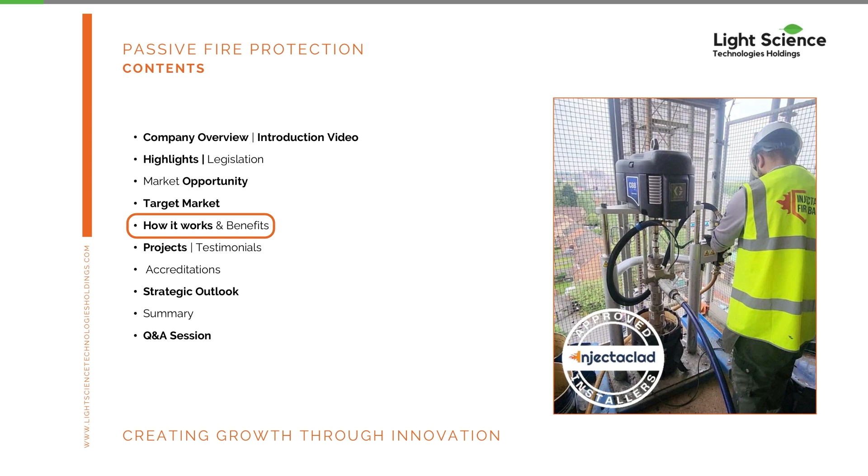In terms of setting the scene, what we're going to do is go through a company overview of Injecta Fire Barrier. We've got a fantastic introduction video that we send across to all of our clients. We're going to look at some of our highlights, the impact of legislation, the market opportunity as it stands today, how the system works and its key benefits, what really sets us apart, our accreditations, our strategic outlook, which is obviously very important today, and then a summary. At the end we'll do a Q&A session. Alternatively, you can come see me at the end and I can go through a little bit more detail.

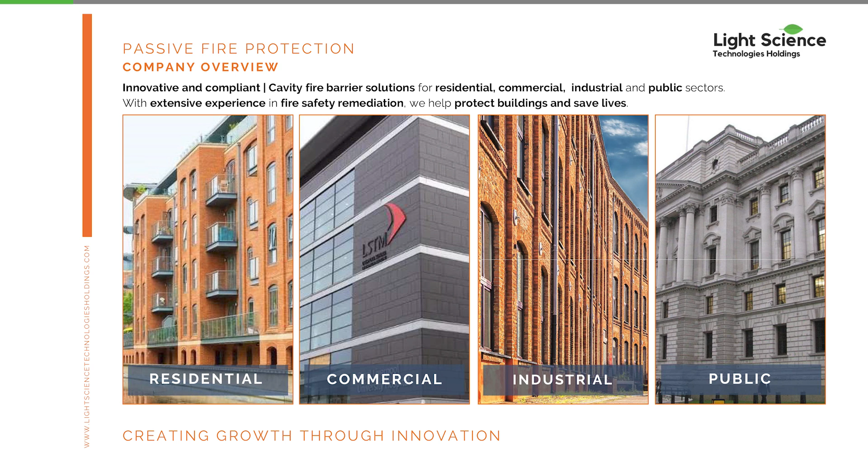In terms of company overview, we are Injecta Fire Barrier. We are leading the way when it comes to cavity fire barrier solutions across a variety of building types - residential, commercial, industrial and public buildings. With the extensive experience within fire safety remediation, it puts us at the forefront of building compliance and ultimately to save lives. What sets us really apart is the fact that we are the first independent Injectaclad installers within the UK. We are solely focused on the Injectaclad solution, so we don't get involved in traditional passive fire protection, which enables us to scale at pace and really focus on this particular industry.

What I'm going to show to you now is our introduction video. This really tells you about the problem that's facing the UK at the moment and also the problem that we solve.

A major fire broke out at a residential building in London. The fire, which began in a refrigerator, was fueled by panels. In the early hours of the morning, this was declared a major incident. There is nothing left of the zone. Certain tragic events in the UK and abroad have exposed the significant failures in building safety regulations and fire safety measures.

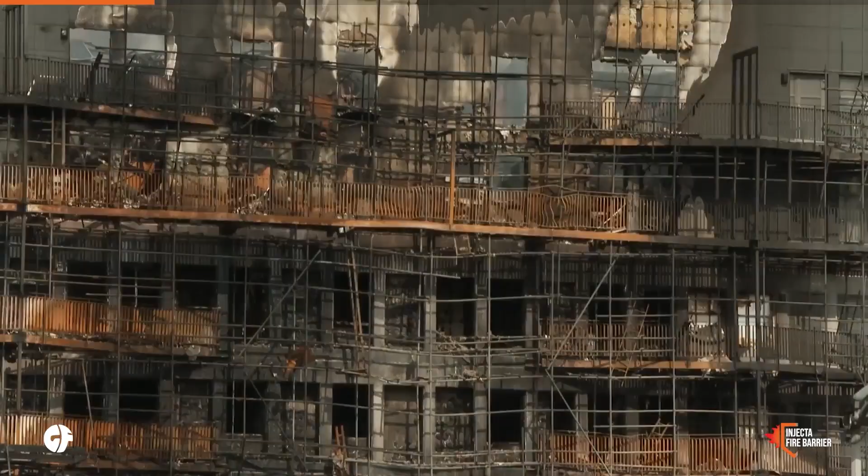In response, the UK government has allocated £5.1 billion to the Cladding Safety Scheme and introduced the updated Building Safety Act of 2022 and Fire Safety Act of 2021 to address fire risks associated with retrofitted cladding and other cavities in residential buildings.

Injecta Fire Barrier, a subsidiary of Light Science Technologies Holdings, are working towards ensuring existing structures are safe, giving peace of mind to owners and occupiers. Injecta Fire Barrier is the UK's first independent approved installer of the Injectaclad system, suitable for installation across most types of buildings with cavity construction.

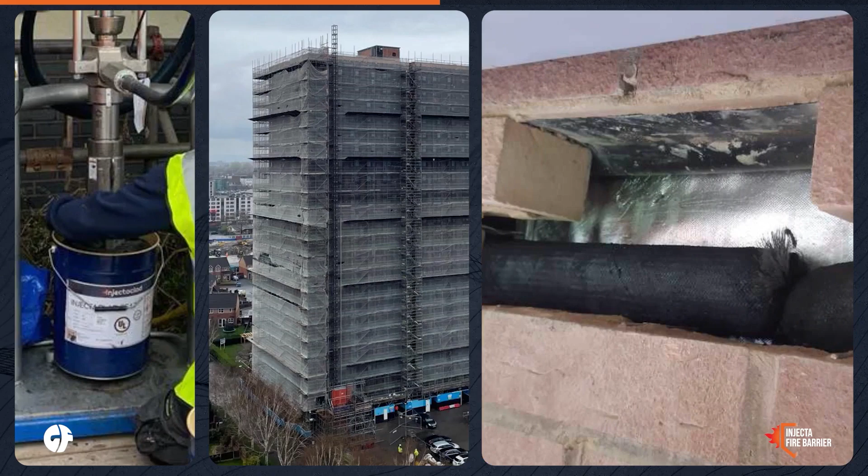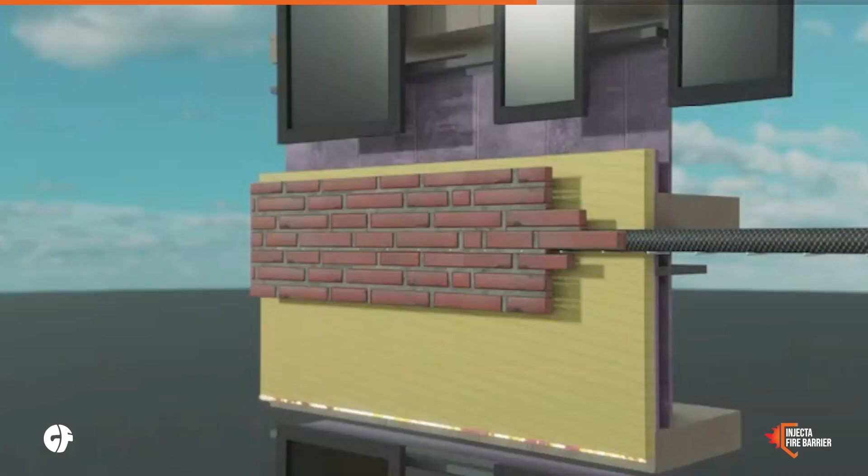Designed and tested to the highest industry standards by leading fire professionals Warrington Fire, Injectaclad is an acrylic-based graphite sealant that can be seamlessly inserted into the desired depth and breadth of wall cavities. It expands up to 20 times upon contact with heat, blocking any voids that would allow flames and smoke to spread in the event of a fire. It has become one of the most successful fireproofing methods.

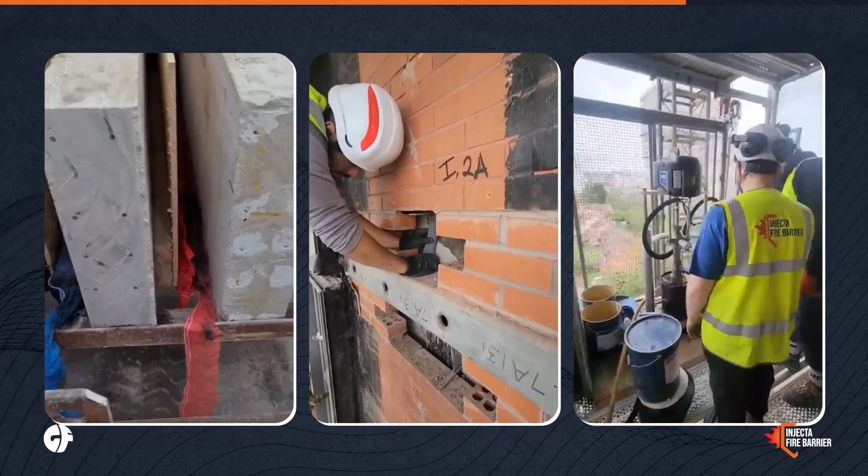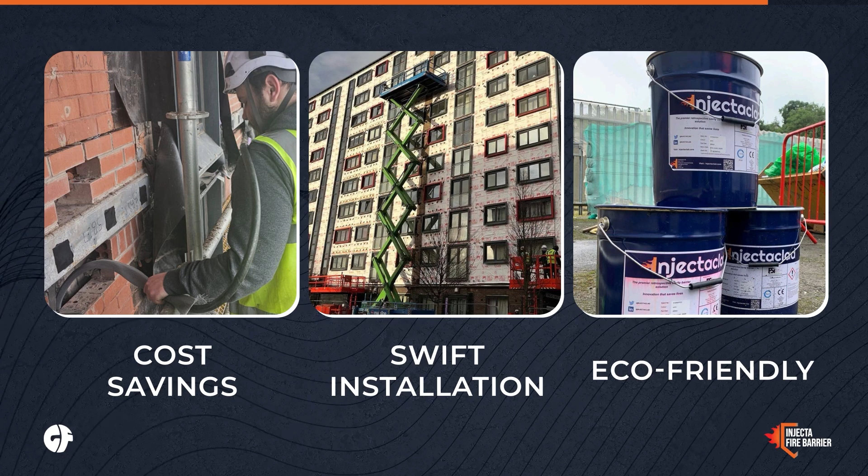Injectaclad has been approved for installation within residential, commercial, industrial and public buildings to reinstate the fire-resistant performance of wall and floor constructions without removing the existing facade, which is often not a viable option. This solution offers huge cost savings, can be installed swiftly across multiple elevations with minimal disruption to occupants, and is kinder to the environment by creating less waste material. With extensive experience in passive fire protection throughout the UK, Injecta Fire Barrier is working with other divisions within the group to support future developments which enhance building safety and ultimately save lives.

Thank you for watching. Again, this is the introduction video that we send across to all of our inquiries. So again, it really gives you the depth and detail of the solution and also the problem that's facing the UK at the moment.

In terms of highlights of 24-25, really excited to report we're profitable and cash generative after H2.

We've received orders to date of £2.7 million. In terms of our quoted pipeline, that's currently sitting at 14.5 million.

So that's qualified pipeline, meaning we've pre-qualified it. To give you a bit more detail, what happens is they contact us, we provide them with guidance, they give us all the technical data, and they also supply the FRA report, which is a fire risk appraisal of external walls, collated through fire engineers. We then go through the report in great detail, and a number of these reports actually specify the Injectaclad solution, which enables us to quote accordingly.

Then we go on site, assess the project, meet the team, and quote against the project on two elements: injection price and prelims. Then we put them through as qualified. This is quoted pipeline at 14.5 million, against 23 quoted inquiries. However, within our system we've actually got 57 quoted inquiries. The remaining ones are unquoted, but we estimate circa up to £35 million.

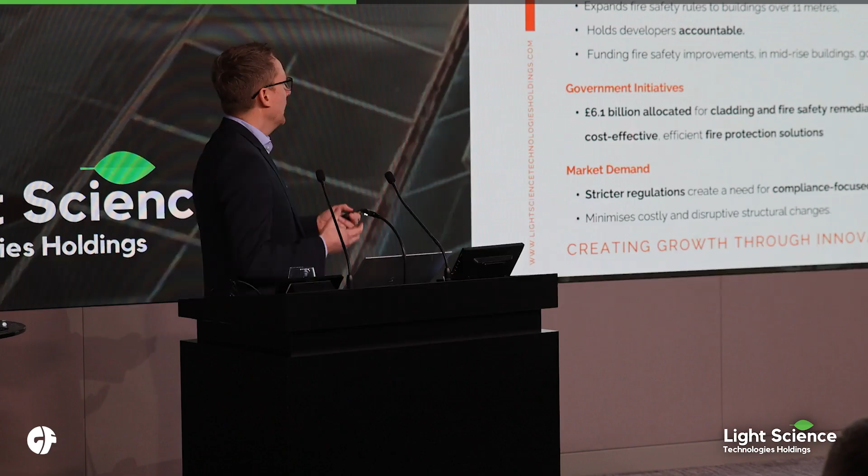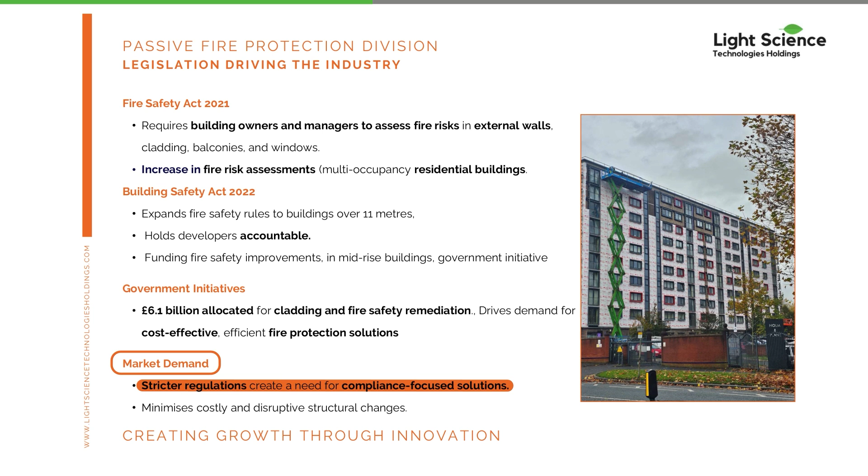Government-wise, there's a government initiative around £6.1 billion allocated specifically for cladding and fire safety remediation. They've actually drawn down £1.1 billion at the moment, so there's still around £5 billion worth of opportunity through specific government funding. In particular, they're looking at cost-effective fire protection solutions. In terms of total market demand, you've got stricter regulations around compliance-focused solutions, pushing towards minimising cost and disruption. Ultimately, from our perspective, that makes us an ideal solution based on the Injectaclad solution.

So looking at market opportunity, what we've got is a bottom-up analysis. This takes into account high-rise buildings, put into two categories: high-rise and mid-rise. High-rise buildings are above 18 metres. The number of remediation buildings in the UK is currently facing around 11,000.

Our typical quoted pipeline, we foresee around £1 million up to 4 million. There's a number of variable factors based on cavity depth - we charge based on linear metre and the size of the cavity. So if you've got a cavity that's 30 mil versus one that's 200 mil, it's obviously going to be more expensive. So typical project value is between £1 million and up to around four times that.

And then you've got the total addressable market, which we estimate at around £11 billion. So what that means is for high-rise buildings, you've got the EWS1, the external wall survey - if they've got a B1 or B2 rating, that's effectively a non-compliant building. That's a fire risk, and then you've got the associated risks of being a fire risk: the potential of being unable to sell the building, and increased insurance premiums if you failed the EWS1.

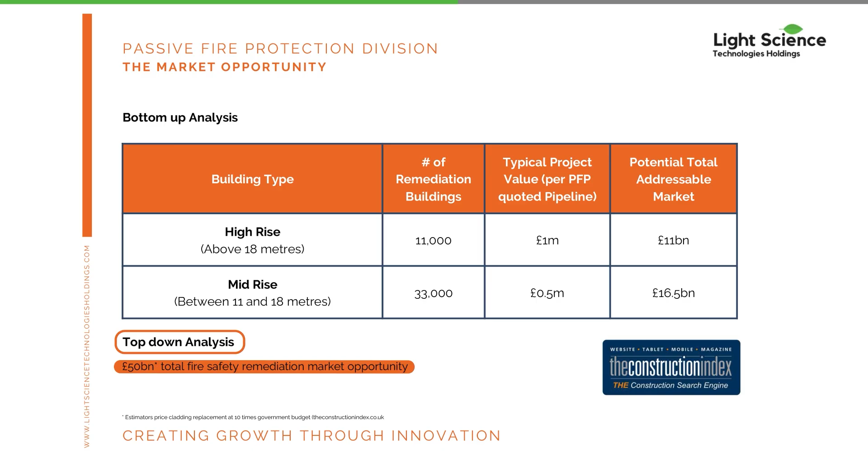So again, the opportunity is significant. Looking at the top-down analysis, in terms of total fire safety remediation within the UK, it's estimated to be worth around £50 billion. But of course, that depends on the particular type of solution. So that's the total market opportunity.

Now looking at our target markets, typically you've got residential buildings, social housing, high-rise buildings, apartments, councils and housing associations. You've got commercial buildings - offices, retail spaces - and mixed-use developments. You've also got industrial, which is warehouses, factories and logistical hubs. And then you've got public spaces such as hospitals, libraries, conference facilities and schools.

Interestingly, based on my analysis, we've received quite a number of inquiries about commercial property being converted into residential, so we've really been supporting a number of our clients through that transition.

In terms of end customers, typically these are building owners and developers that would contact us, and then you've also got the contractors and consultants. There'll be a principal contractor who'll speak to ourselves about supporting them through the transition of the remediation project.

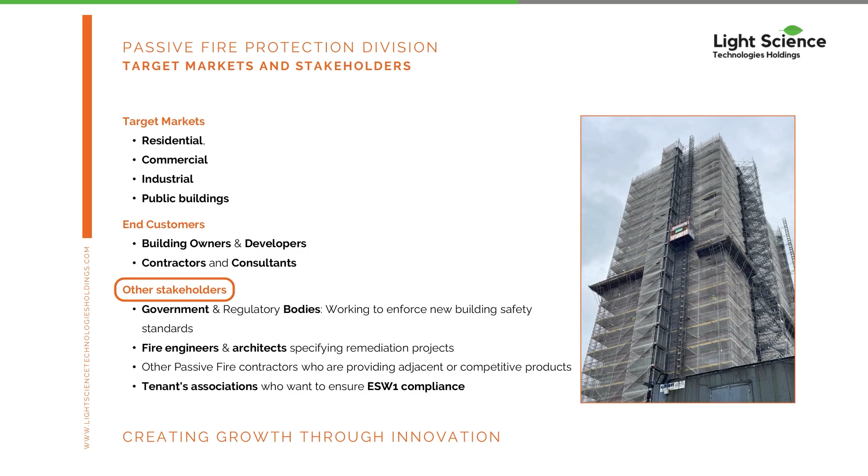In terms of other stakeholders, you've got the government and regulatory bodies around building safety standards, and fire engineers and architects specifying the remediation project. We get a number of inquiries from fire engineers where they've specified within particular reports that they're recommending the Injectaclad solution. And then you've got tenant associations.

There's a big push at the moment, and a lot of coverage in the news, around EWS1 compliance, where buildings need to be certified and signed off. And if they haven't, then they need to get that remediation work completed.

So just to recap how the system works: it's an acrylic-based graphite sealant, and what it effectively does is we pump it into a void under compression, and then we use a reinforced mesh made of polyester, and stainless steel holding pins. So what it does, it holds it in place. I wish I had a laser, I could demonstrate it for you here.

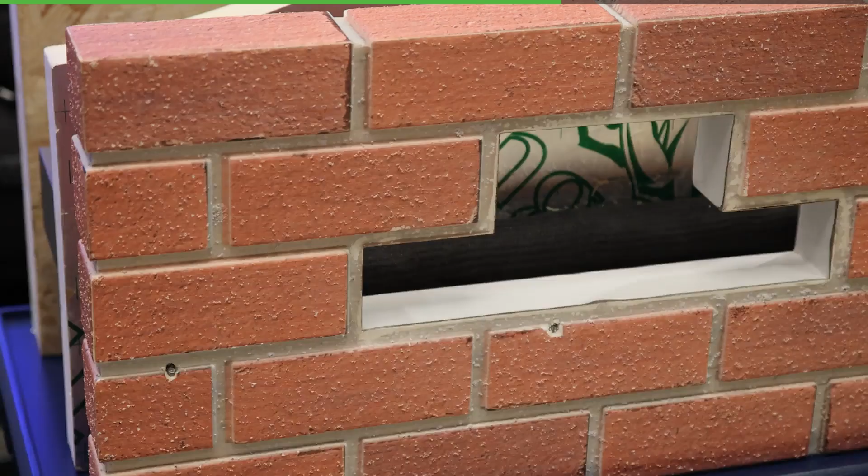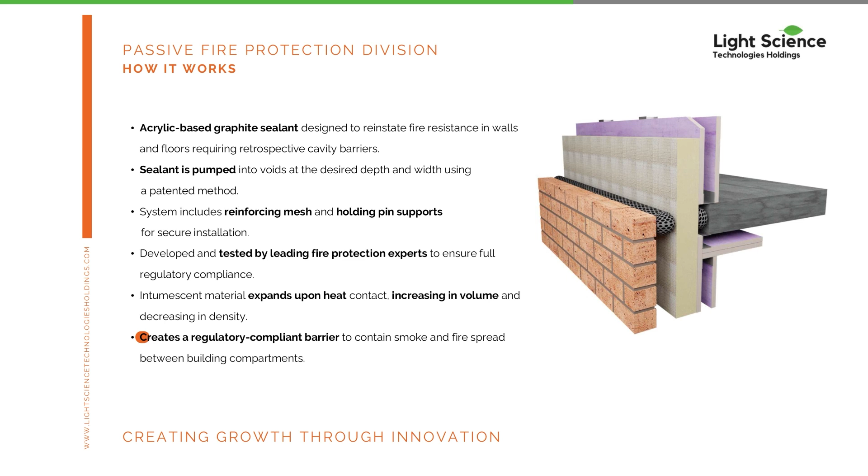It's developed and tested by leading fire protection experts for full regulatory compliance. It expands upon heat, meaning that in a fire it expands up to 20 times its size. So if you've got a void, a PIR for example, or insulation, and that burns away, it expands into that void, giving occupants up to 120 minutes of safety. So really, really important - it creates a regulatory compliant fire barrier system.

In terms of key benefits, what really sets us apart is you don't need to remove the existing building facade. We get a lot of clients telling us they've been quoted millions upon millions of pounds to remove a building facade, whereas this solution doesn't require that. It's a speedier installation compared to traditional facade removal, and we can install it vertically or horizontally - that's pretty much the standard.

In terms of occupants, it's minimal disruption. One key benefit is we don't need to ask people to leave the building, their homes - our solution is all completed externally, with no disruption whatsoever. As a developer or building owner, you don't want that additional cost. It's also more environmentally friendly, because you're creating less waste material by not removing the facade. So the benefits are: you don't need to remove the facade, it's speedier installation, minimal disruption, and more environmentally friendly.

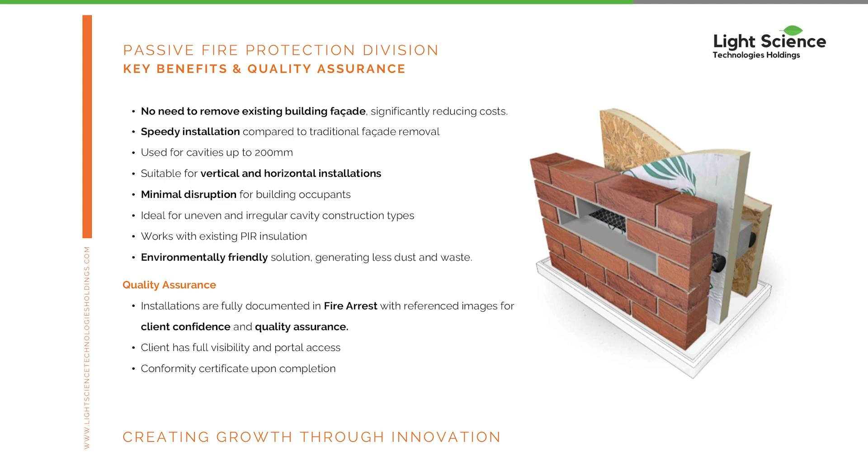When it comes to quality assurance, once the work is completed, unfortunately the amount of care and dedication that goes into the job can't be seen because you've put the facade back. So what we do is record everything on a system called Fire Arrest for quality assurance, which instills client confidence, and in terms of trackability they've got full visibility within the app.

We record up to 15 to 20 images of each and every stage of the process - exposing the cavity, installing the pins, inserting the sock, closing the cavity - and effectively it's a closed system. The client has full visibility, so when we're on a project they can dial in and see all the information, and at the end they get a full report and we issue a conformity certificate, backed through IFC.

Now in terms of some of the projects to date, just a few, we're very proud of these - we've got projects in progress and some completed. We've got a Salford project valued at £600,000, which was a vertical installation.

Again, it just demonstrates the partnership that we've created with some of our clients. Originally, from memory, that was around 6 buildings. And then they've asked us to come back for a part 2, effectively, for an additional 2 buildings. So you've got Salford part 2 on the right-hand side, which was valued at 1.175 million.

And then you've got a project that we completed in Liverpool, which was for a medical research facility. Again, that was a vertical installation. And then we've completed a project, or it's in progress, at Nottingham, which was valued at 757,000. That was actually student accommodation, and we seem to be getting a large influx of student accommodation coming through. So that's just a handful of some of the projects that we've got going on, and many, many more on the pipeline.

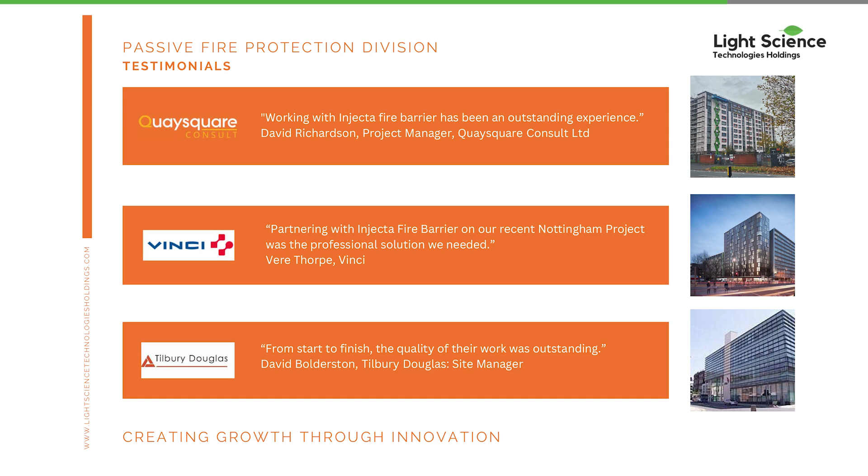So we've got Quaysquare Consult, which was in Salford. We've got Vinci, which I'm sure some of you will recognise, which was for student accommodation in Nottingham. And then we've got Tilbury Douglas, again a very large company, which was for the medical research facility in Liverpool. And some of the things that they've really mentioned to us was: we didn't know you were there because we were so quiet. Ease of installation, cost savings, minimal disruption, and the professionalism from start to finish.

Now, looking at our accreditations, again, we're very proud that we hold a number of leading industry accreditations. Just to name these ones - effectively what this demonstrates is our safety and quality and compliance, our dedication. So we're IFC certified, so that's the International Fire Consultants. You've then got the UK Building Regulations and Fire Safety Standards. You've got the ASFP, which is the Association for Specialist Fire Protection.

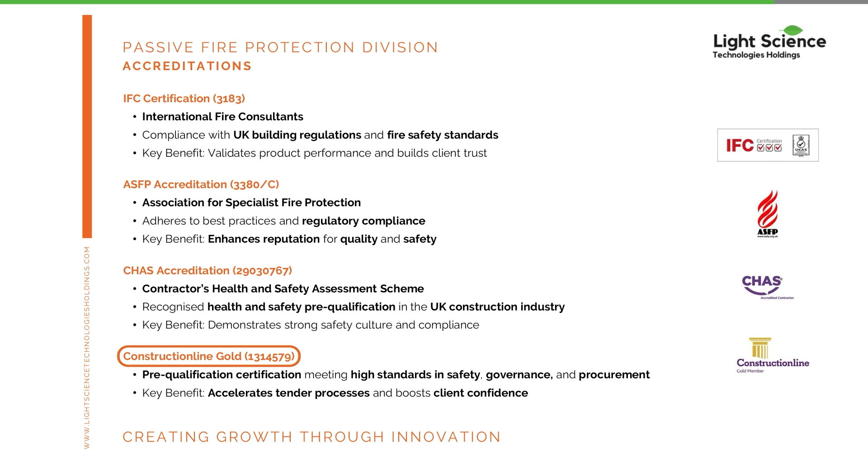Again, this is all around regulatory compliance, and then obviously the benefit is around enhancing our reputation, quality and safety, CHAS accredited. So this is about the health and safety assessment scheme and around pre-qualification within the construction industry. And we've just recently been awarded the Constructionline Gold from Silver. Again, this is all around pre-qualification certification, and it's about the highest standards in governance and procurement, and in terms of it helps us when it comes to the tendering process.

I suppose to mention why this is really, really important is a number of these accreditations - if we don't have them, our clients won't work with us. So when we go to pre-meetings or we're speaking to clients, if we don't hold a number of these accreditations, they will not work with us. They will not add us to within their framework. So it really, really does set us apart, and it also sets us apart on the basis that as only a handful of installers, we've got a number of accreditations that a number of the competition don't have.

So looking at strategic outlook for the next 12 months, again, it's around leading the way, and continuing to be the leader as an independent installer of the Injecta solution. Continuously raising awareness, banging the drum when it comes to speaking to fire engineers, architects, and also the building safety regulator. Leveraging our quoted pipeline of 14.5 million, and again that's predominantly focused around high-rise buildings, mid-rise buildings, and then also working with our partners around getting hold of their portfolio and looking after it for them.

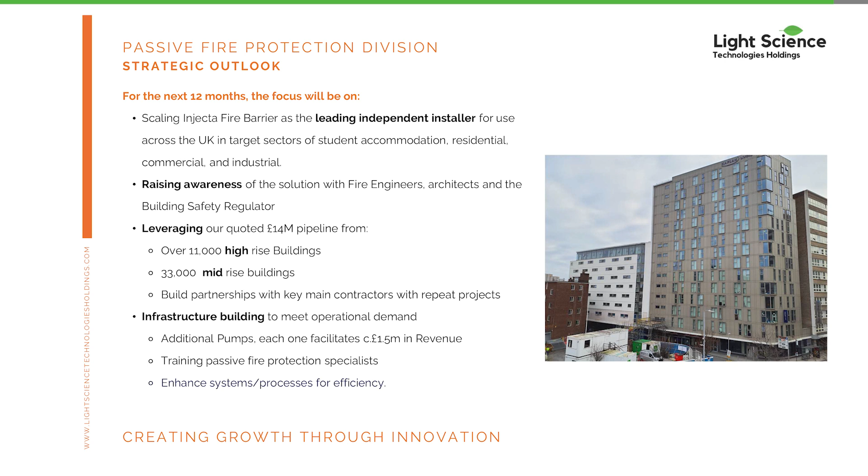We've then got around looking at our systems and processes, and then also acquiring additional pumps, and building on our team, and then obviously continuously developing our existing fire protection specialists.

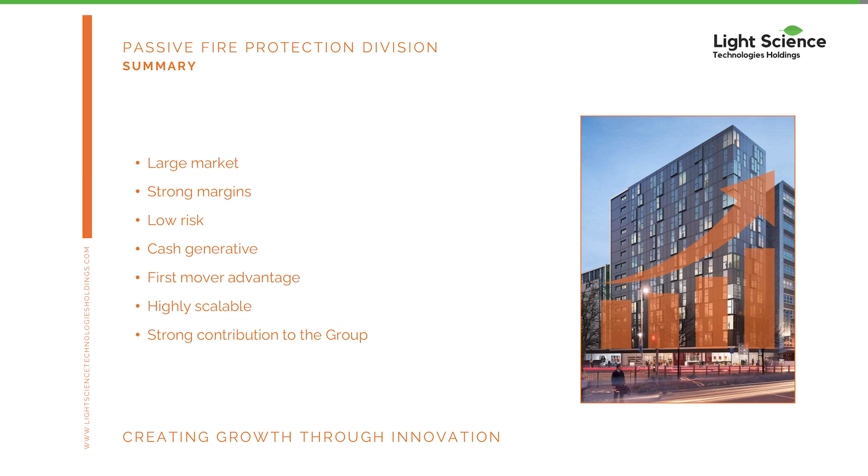So in summary - I was going to say massive, but I'm not going to say massive - large market, it's a very, very large market and incredibly strong margin. It's low risk. We're very cash generative, which is fantastic, which is based on our margin. We've got first mover advantage. We're highly scalable within our teams. Again, we can do a number of projects very, very quickly. And then we're a strong contributor to the group, and that's very, very important.